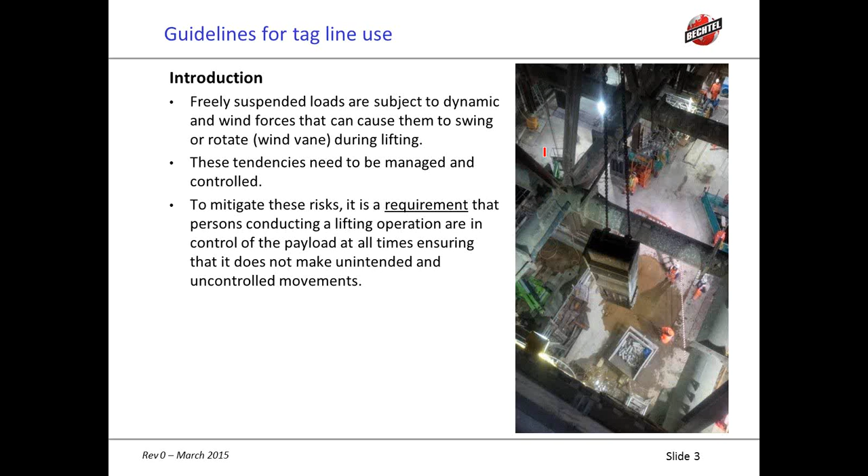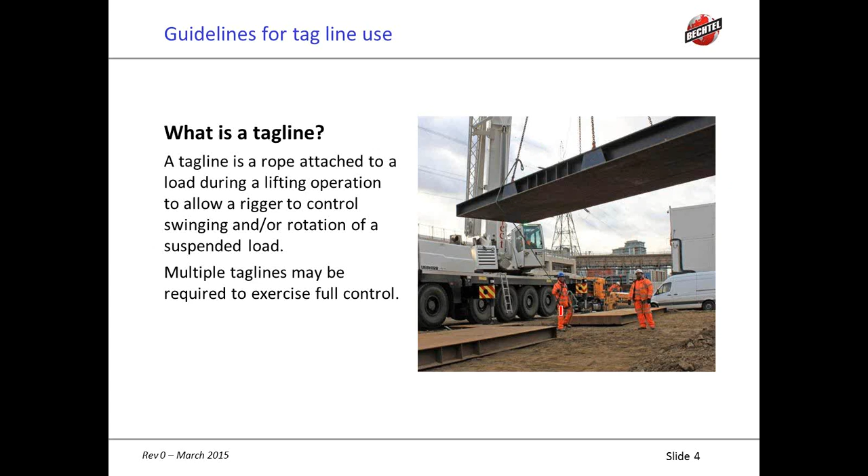So what is a tagline? Well, I assume all of you pretty much know what a tagline is, but for those who don't, it's a rope attached to a load during a lifting operation to allow a rigger to control swinging and or rotation of a suspended load. And multiple taglines might be needed to exercise full control. This here being the tagline, obviously, and this being the model tagline handler.

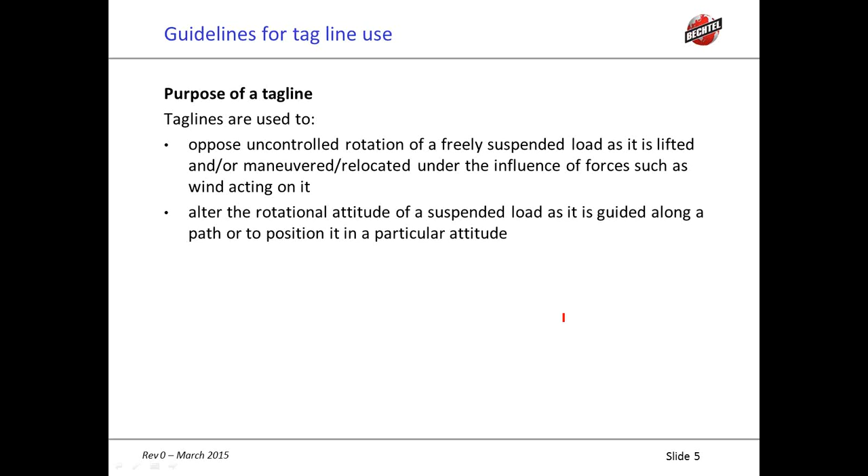Okay, the purposes of a tagline. We're going to talk about what it is and what it isn't. Taglines are used to, first of all, oppose uncontrolled rotation of a freely suspended load as it's lifted and or maneuvered or relocated under the influence of forces such as wind acting on it. Secondly, to alter the rotational attitude of a suspended load as it's guided along a path or to position it in a particular attitude. Thirdly, to assist in controlling swinging induced during lifting. And fourthly, to avoid the need for persons to put their hands directly on the load to control it, where that would pose a hazard, allowing safe distance between them and the load.

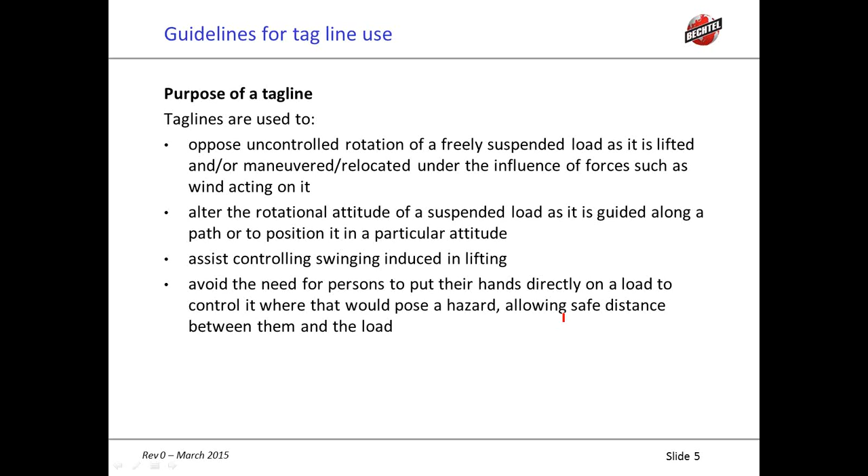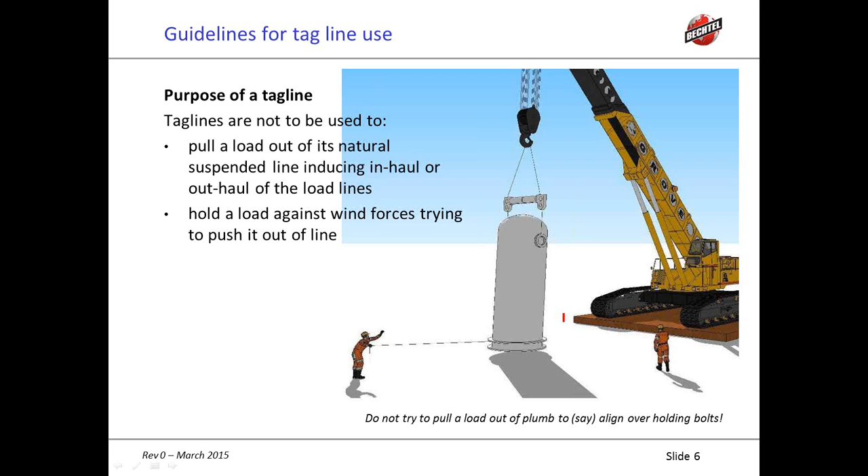Taglines are not to be used for pulling a load out of its natural suspended line, inducing in-haul or out-haul of the load lines. As you can see on this little sketch here, he's dragging it out of line. Secondly, it's not to hold a load against wind forces that are trying to push it out of line. You really cannot fight wind forces directly with taglines. Thirdly, you may not use a tagline to contribute to supporting the load.

Looks like we've got over half the people voted already, so about 5 more seconds, I'll open it up. Alright, that's about 3/4 of you have voted, so I'll close it now. The results are pretty clear: 91% say no, and 9% say yes. As Keith mentioned, keep this in mind, and we'll revisit this at the end. So back to you, Keith.

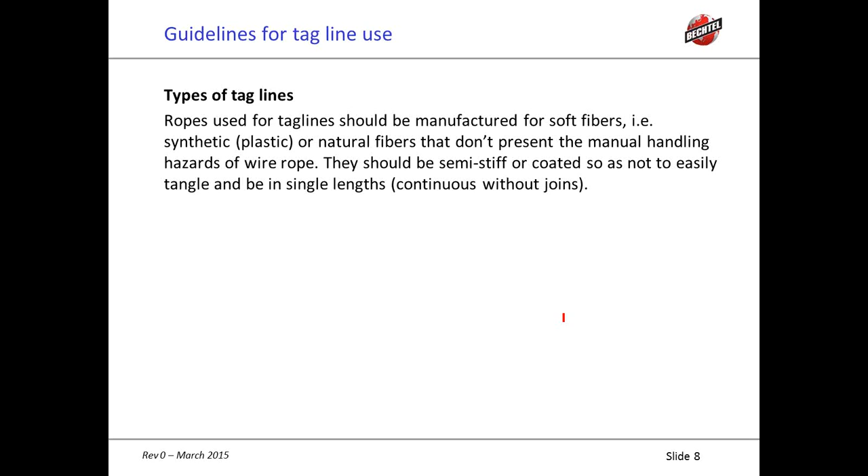Okay, types of taglines. Ropes used for taglines should be manufactured out of soft fibers, such as synthetic plastic rope or natural fibers that don't present the manual handling hazards of wire rope. They should be semi-stiff or coated so as not to easily tangle, and be in single lengths — in other words, continuous without knots in the middle tying an extra rope on. The types of rope we want to use, either natural or synthetic fibers, are made out of hemp or cotton. They're twisted or braided rope, either one. Nylon, polyester, and polypropylene.

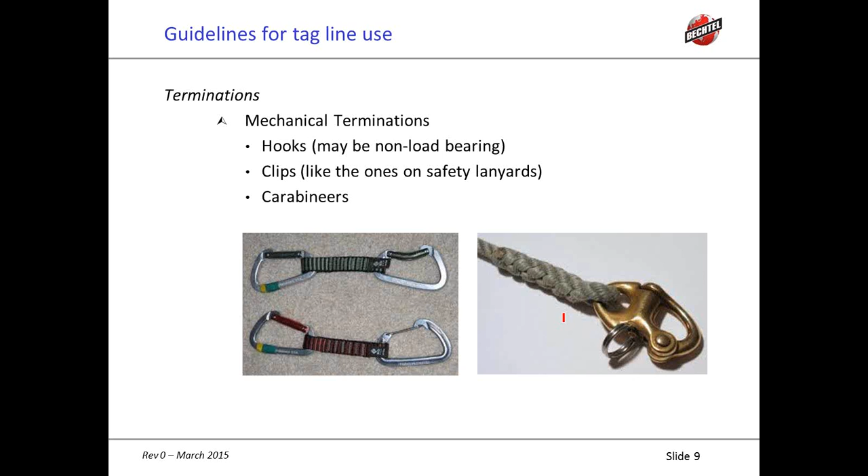The terminations that we use are mechanical terminations such as hooks, clips, or carabiners. These can be load-bearing or non-load-bearing. Also, terminations such as eyes in twisted rope, like a braided thimble, a soft eye, or a turn back eye, and in braided rope the same way. Note that using a tagline with a braided eye on one end allows us to choke it around, say, steel, for easy control and removal by personnel at heights.

Now the knots that are in the rope that we'll use to attach the loads, we're going to talk about those later. But there's also availability of retractable taglines, and we have a link on here for those.

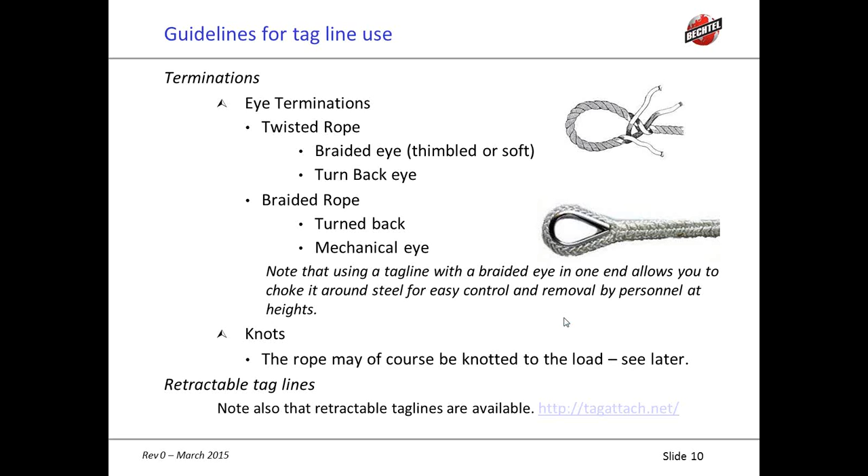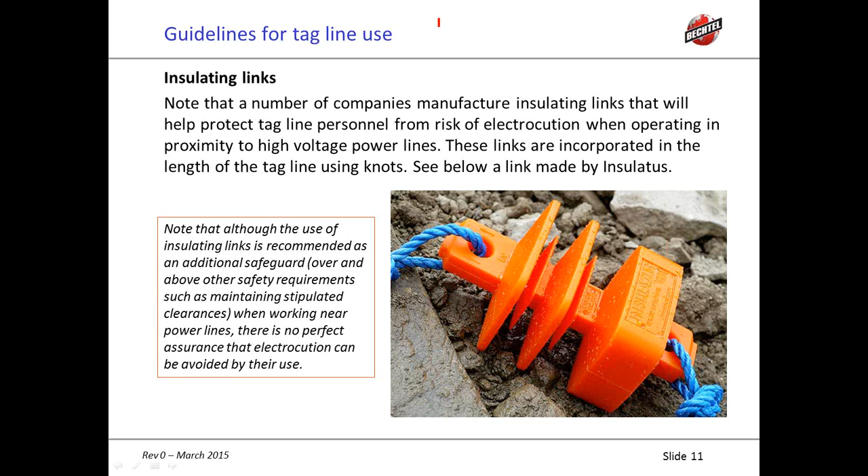Okay, insulating links. Note that a number of companies manufacture insulating links that help protect tagline personnel from risk of electrocution when operating in proximity to high voltage power lines. You would incorporate these links in the length of the tagline using knots close up to the load. The one you see there is a link made by a company called Insulatus. Although the use of insulating links is recommended as an additional safeguard over and above other safety requirements, such as maintaining stipulated clearances when working near power lines, there is no perfect assurance that electrocution can be avoided by their use. They are, however, a useful tool to have in the arsenal.

So why would a load want to rotate? There's a couple of reasons why a load may want to rotate on the hook as it's lifted and maneuvered. The main reason is the action of wind forces. Unless a load has the same area to the wind regardless of rotation, it will want to rotate in a wind to present its least area to the wind — which is the principle of a weather vane. For instance, a vertical cylindrical chemical vessel may show little or no tendency to rotate in a wind, whereas a long flat-sided steel beam of the same area may show a pronounced tendency to rotate at the same wind speed. Understanding this is a key factor in deciding whether or not taglines are required to control rotation.

Secondly, the load lines may spin up some as the load is lifted. Using taglines, the load can be held static, allowing the spin up to shake out at the bearing in the hook block. There's the two points.

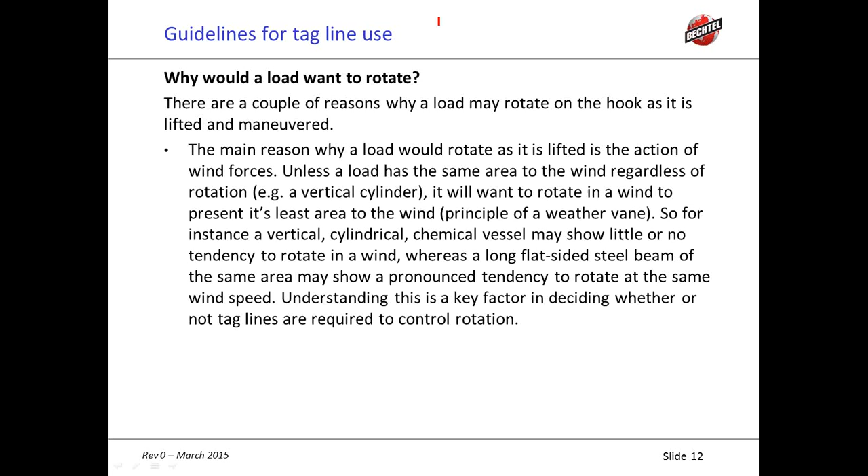Here's a couple of graphics illustrating that point. The vessel on the left is vertical and symmetrical. There's no particular reason why that wants to rotate anywhere in the wind, apart from maybe a little bit of load on the spreader, but the beam on the right will definitely want to rotate to present its least area to the wind, and could quite conceivably get very close to that crane. So the shape is important, not just the area.

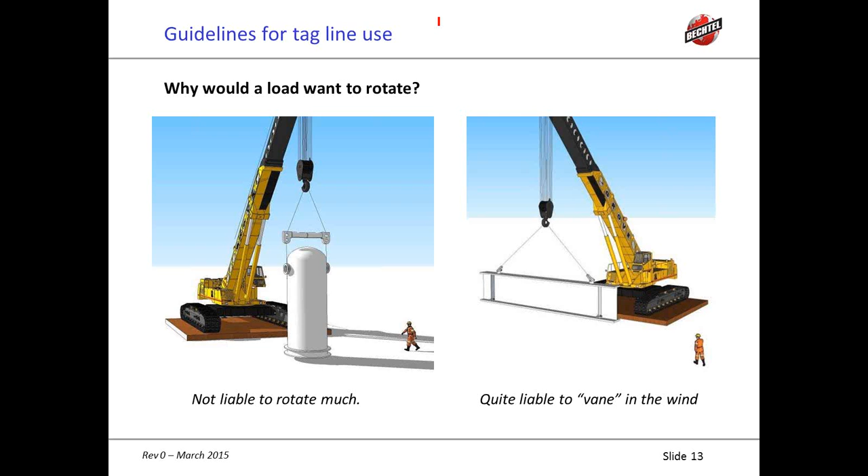Before we get too much into taglines, an understanding of the forces is important, because they can be a whole lot different than you might imagine. So let's talk a bit about wind speed, pressure, and the forces induced. The magnitude of the forces and the rotational effects acting on a load when that load is subject to wind is often not well understood, and underestimation can cause big problems. So it's time to look at some theory.

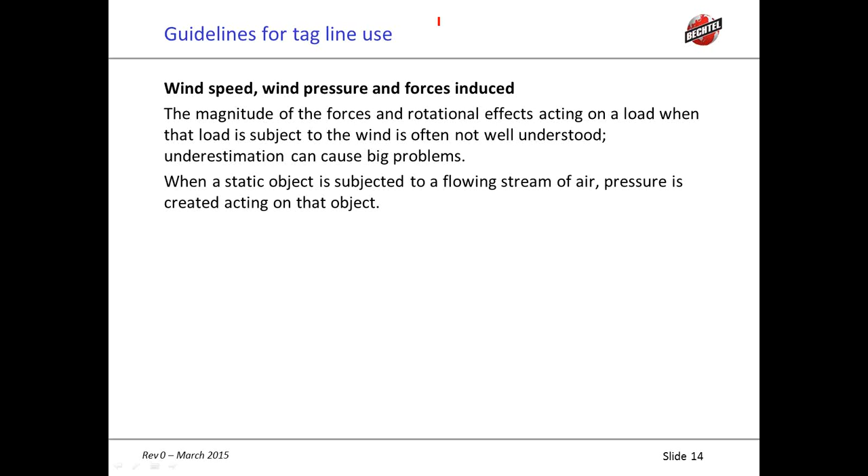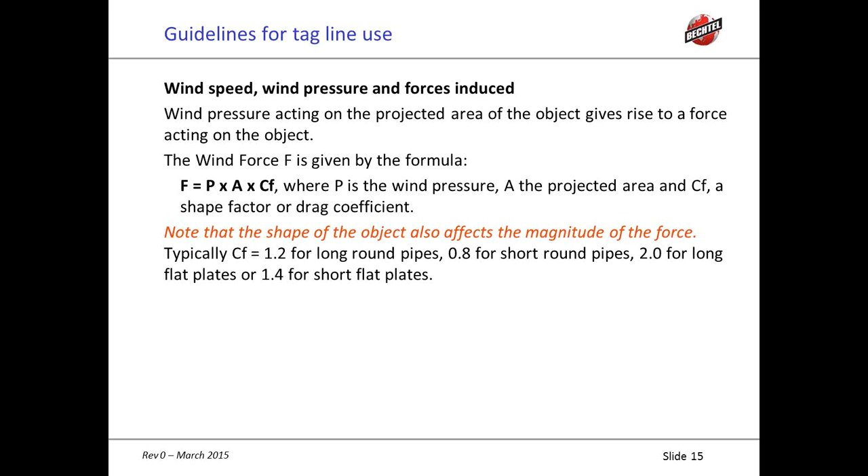So how does that relate to forces acting on the object? The wind force is given by the formula where F equals the pressure times the projected area A times the shape factor, or drag coefficient. So the shape of the object also affects the magnitude of the force. Typically you've got a factor of 1.2 for long round pipes, 0.8 for short round pipes, 2 for long flat plates, or 1.4 for short flat plates.

Wind speed is often referred to using the Beaufort scale, on a scale of 0 to 12, where 6 is a strong breeze, and that would equate to about 25 to 30 miles an hour. In the handout we're going to give you access to, there's a guide to the Beaufort wind speeds. We don't give it to you here in this presentation. Note that the standard height at which wind speeds are quoted is 33 feet above grade. So if you see a wind speed quoted, it's intended that it's at that height.

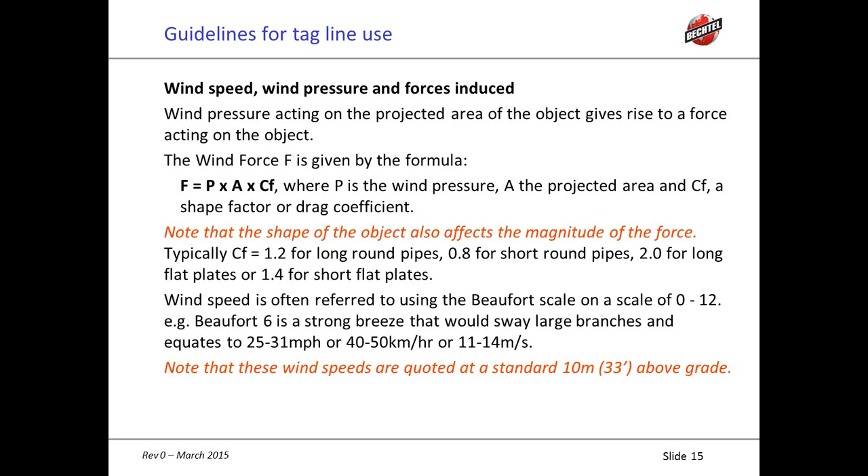Of course, the wind speed you're actually interested in is what's blowing on the suspended load, and that can be a whole lot different from the wind speed down at ground level, noting that we've just said wind speeds are quoted at 10 meters or 33 feet above grade. The wind speed actually increases logarithmically with height according to a curve similar to the following, and what that curve looks like depends on whether the air is stable, neutral, or unstable, whether it's over water or land, and whether the site is disturbed by human habitation and so on. In this case, the wind speed at 100 meters or 330 feet, down here somewhere, is twice what it is at the base level of 10 meters or 33 feet.

So this means that the pressure is 4 times that at 10 meters. You need to be aware of this. For lifting purposes, the wind speed indicated on the anemometer on the boom head should be used, as that's what's actually happening at height.

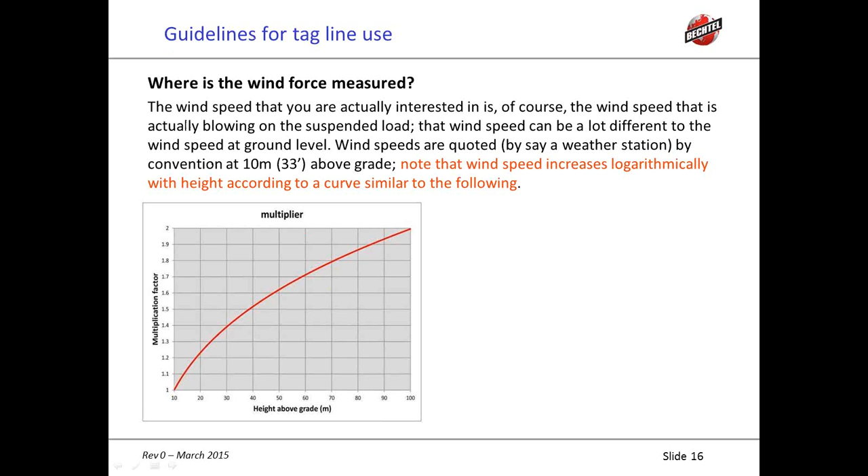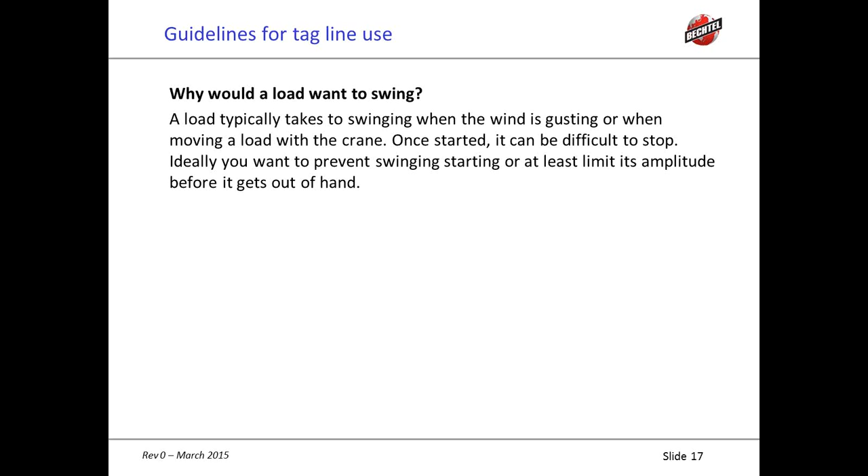So why would a load want to swing? A load typically takes to swinging when the wind is gusting or when moving with the load on the crane hook, and once started, it can be difficult to stop. Ideally, you want to stop it swinging in the first place, or at least limit the amplitude before it gets out of hand.

If an unrestrained suspended load is subject to a sustained wind force, it actually moves sideways, inducing an out-of-plumb angle in the suspension. The forces balance when the horizontal component of the tension equals the wind force, and the load reaches a state of equilibrium at a slight out-of-plumb, so long as the wind continues to act in a constant manner.

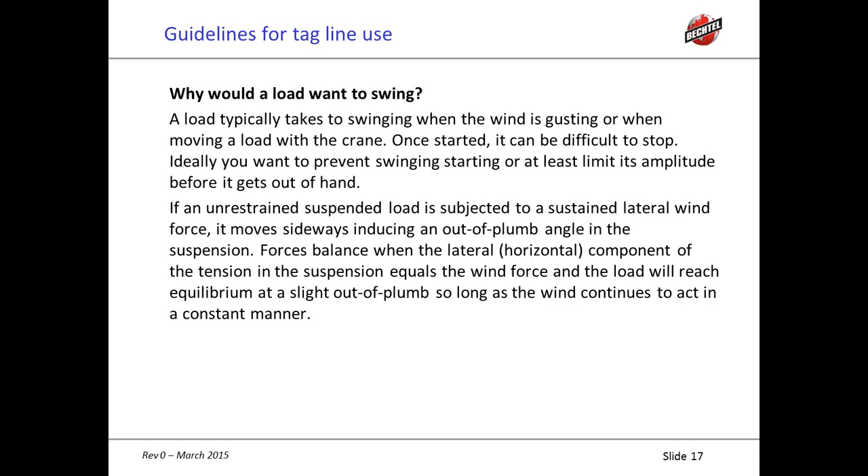Of course, the second the wind drops, that force is no longer there, and the whole thing starts to swing. So let's look at an example here. We'll just do it in the US customary units.

If you take a 10-foot by 10-foot cladding panel in a 20-mile-an-hour breeze facing the wind, and assuming a shape factor of 1, there's going to be 100 pounds of wind force acting on that panel, remembering that the pressure is the wind speed squared over 400, multiplied by the area, gives you the force. That's where the 100 pounds comes from.

If the panel weighs 1,000 pounds, the load will move horizontally approximately 1/10 of the suspension height until the forces balance. So if you have a suspension length of about 50 feet, the load's going to move about 5 feet sideways in that wind, which is a pretty considerable distance. If the wind drops, it'll tend to return back to plumb, and swinging will be induced.

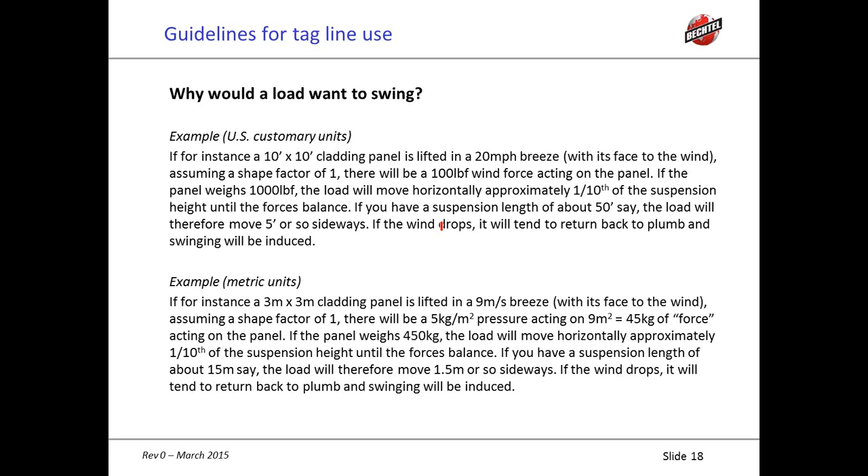So it's not just the fact the wind is blowing. Gusting is a major issue. So why would a load want to swing?

Well, on account of inertial effects. When you move a load with a crane, the crane moves forward, but the load initially stays where it is, which is inertia, until accelerated by the horizontal component of the tension in the now slightly inclined suspension. If the crane suddenly stops moving, the load's momentum keeps it moving, and it will swing like a pendulum until eventually it comes to rest.

To minimize this, an operator should gently accelerate and decelerate the crane so the load keeps up with the crane without swinging wildly.

Note that there is a natural frequency to the swing, which is independent of weight and is related to the suspension length. If you're really unlucky, wind gusting can reinforce this natural swing, ever increasing the amplitude of the swinging. You can see from this that light loads with large sail areas can be particularly problematic.

So the takeaway from all this is, don't lift light loads with large sail areas in high winds. If loads start to swing, attempt to damp down the movement. If that's problematic, possibly turn the load to present its least area to the wind, wait until it stops swinging, and then turn it back and try again with improved control.

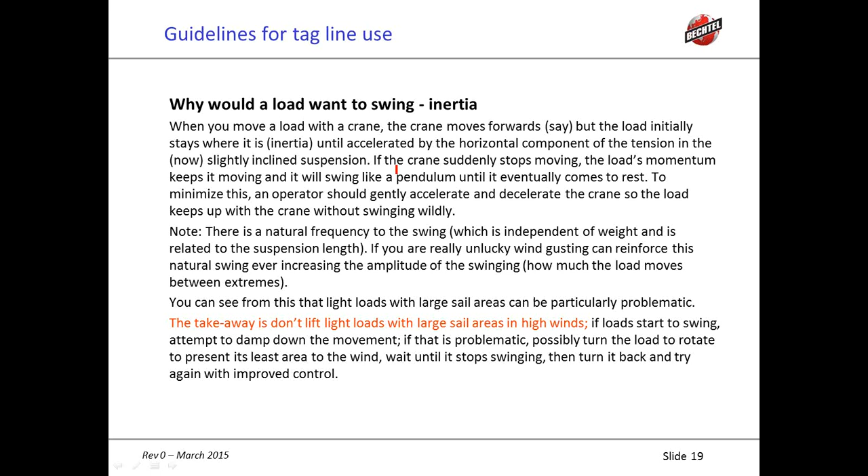OSHA in the States says taglines on a load are required where hazards to employees exist, in order to keep the loads under control. So it doesn't say you have to use them all the time, it says where hazards to employees exist. In the UK, LOLER says appropriate measures should be taken to prevent a freely suspended load from moving in an uncontrolled manner where the risks justify it.

Taglines may be necessary to stop the load swinging, for example with an overhead crane. And the British Standard relating to cranes says, if one or more handlines or taglines are required to give more control of the load, the appointed person should designate persons to handle the lines.

So a common theme is that taglines are required to control a load where they're needed. On the other hand, where they are not required to control a load, they're not required to be used. That said, I would recommend they are used unless they would serve no useful purpose and could potentially create a snagging hazard. How many taglines you need, where they should be located, and what their purpose is needs to be evaluated as part of the lift planning exercise and should come out of the initial risk assessment.

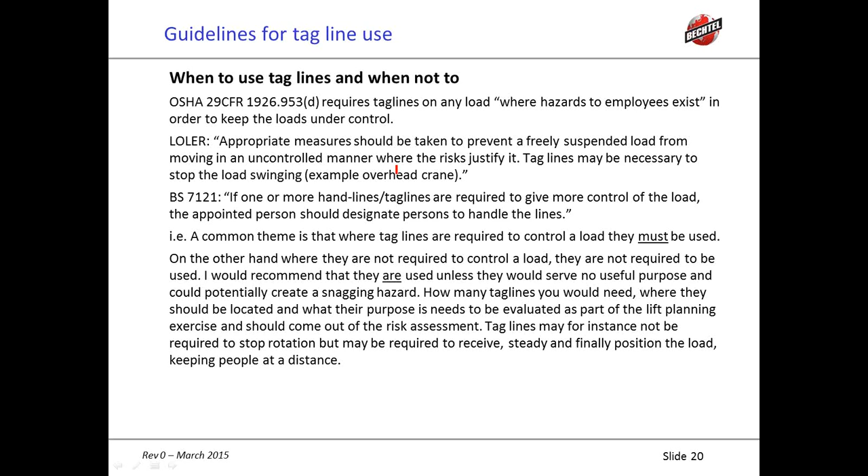Taglines may, for instance, not be required to stop rotation, but they might be required to receive, steady, and finally position the load, keeping people at a distance. Taglines should, therefore, be used unless they would serve no purpose and could actually create a hazard.

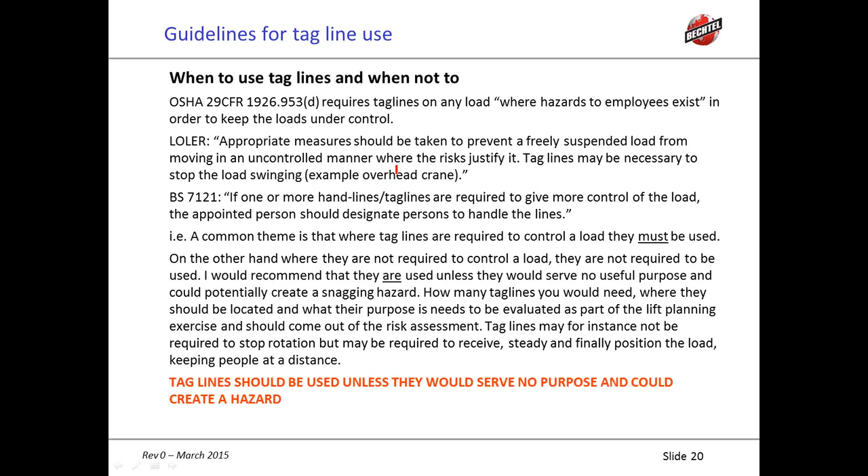What about loads that are suspended from two cranes? Up till now we've been talking about singly suspended loads, but in this case we have a tandem lift. Loads suspended from two or more lifting devices, cranes for instance, will not freely rotate in the wind, but they may swing a little.

Trying to use taglines to rotate a load suspended from two cranes is a really bad idea. First of all, you're going to store twist. The second you release the line, the load will revert back to its natural attitude in an uncontrolled manner. Secondly, you don't have the strength to fight the cranes, so you should carefully consider whether the use of taglines in these cases contributes anything useful. Of course, it may be required to control swinging of the suspended load, so that might be your rationale for using them in this case.

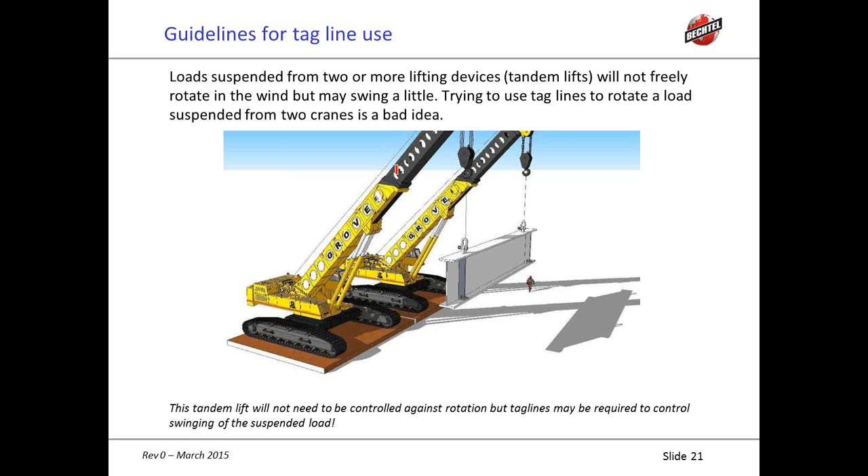Putting your hands on the load, manual control. There may be instances when it's necessary for one or more persons to put their hands on the load, for instance, final alignment over holding down bolts. Trying to do this with taglines could virtually be proved to be impossible, but there's a few things that we need to keep in mind.

Number one, never reach above shoulder height to access a load. Place your hands on the surface and never in, on, or under the load, or at the end of a load, especially when swinging or booming. Maintain an arm's length away from the load. Walk the load down. Reaching down also, the same as reaching up, moves you closer to the load.

Dynamic effects on the load, such as wind, pendulum actions, and swinging, can put you at risk. Never place any part of your body in between a load and another object, such as a pinch or a crushing point. Make sure that good communication is always maintained, especially when hands are on the load. Keep your fingers, nose, and toes, etc., well away from pinch points. Raising or lowering should only be initiated at the command of the person in charge and after confirmation that everyone is clear.

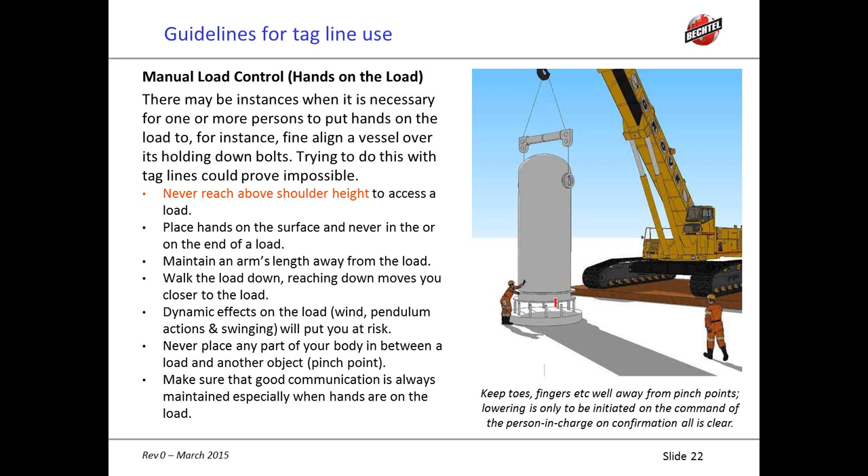You can see here that the guy who's doing the signaling is in clear sight of the guy who's controlling the load here, and also the crane operator. It's important that all the participants in the operation are in good communication with each other.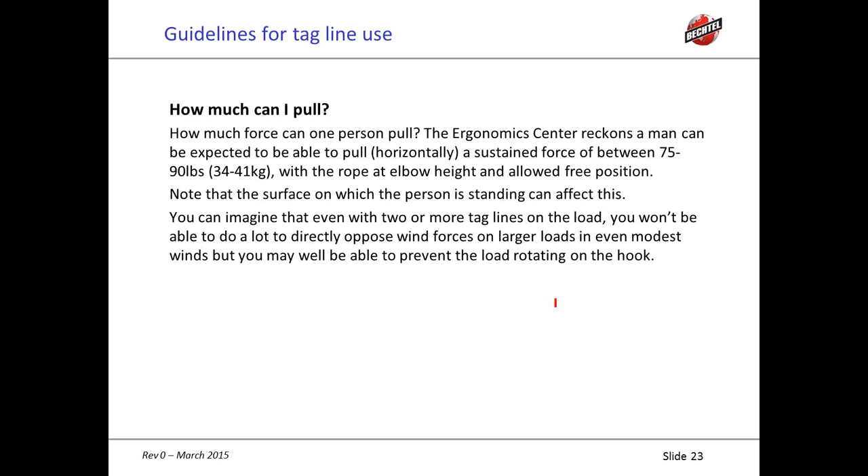So how much can we pull? How much force can one person pull? The Ergonomics Center reckons that a man can be expected to pull horizontally a sustained force between 75 and 90 pounds, or 34 to 41 kg, with a rope at elbow height in a free position. Note that the surface on which the person is standing can affect this. Even with two or more taglines on a load, you won't be able to directly oppose wind forces on larger loads, even in modest winds, but you may well be able to prevent the load from rotating on the hook.

So how much can we pull? We thought we'd test it out. So I went back here in the warehouse and weighed myself, came out just over 200 pounds, then took a scale, tied one end of it to an immovable object, and got on the other end with it. You can see my stance here. With a maximum sustained force, a max of force, I got about 90 pounds.

A sustained force of about 75 pounds. Our practical test confirmed this, that a 200 pound man can pull about 90 pounds max when allowed a free stance and standing on a rough surface. This reduces to about 75 pounds sustained. I moved inside on smooth concrete where the friction is less and I could pull less. So it's reasonable to project that a lighter man would pull less than this.

As a rule of thumb, a man might be able to pull a maximum of about 45% of his weight and a sustained pull of about 35% of his weight. Now this is at a horizontal pull. This is a bit subjective, but it gives some measure to work from. If your boots cannot get a good grip on the ground, this can be a lot less.

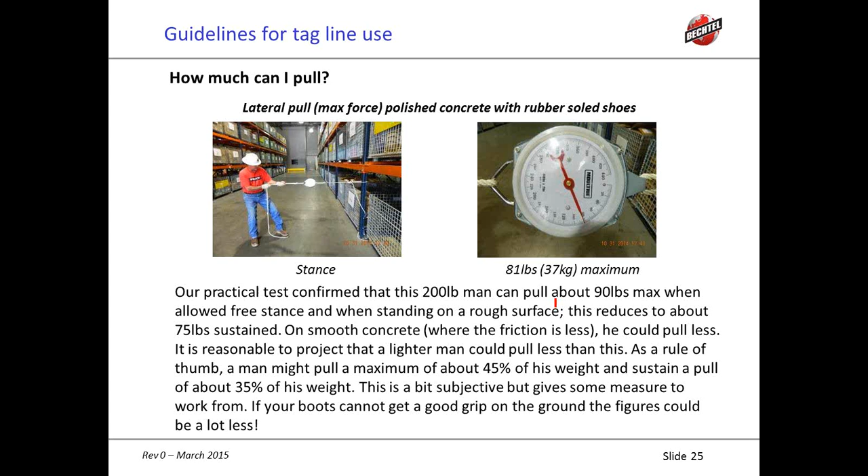So, factors affecting the effectiveness of the pull. Given that you have a limited ability to pull, you want to make your pull as effective as possible. To achieve that, the aim is to make the moment arm as great as possible, to give your pull the maximum turning effect about the crane hook.

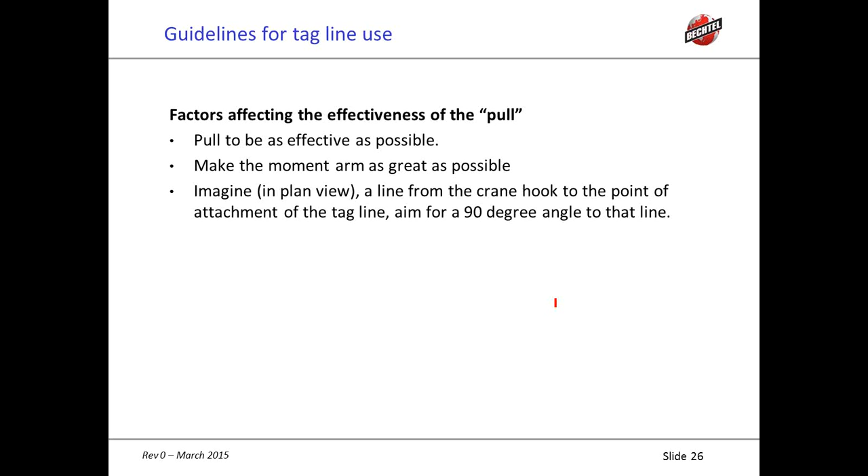The moment arm is the horizontal distance perpendicular from the point of rotation, i.e. the crane hook, to your line of pull. In other words, you want to be square on to the axis you're turning around. If you imagine in plan view a line from the crane hook to the point of attachment of the tagline, your pull is most effective if it makes a 90-degree angle to that line. Obviously you cannot realistically achieve that all the time, but that's what to aim for.

So what am I talking about? Well, if you look down here on the bottom picture, this is pretty effective. The line of rotation is going to be at the center of the bearing here, so it's going to rotate around this axis. This guy here is on a tagline, he's got his line horizontal, and he's making about a 90-degree angle to the line from here to the point of attachment. So if you imagine that line there, he's making about 90 degrees to it. And this other guy on the other end is doing about the same. But between the pair of them, they can prevent rotation in either direction.

You look up here, for instance, and they've got themselves stood off to the end here. If you project that line through, it has a very small distance to the axis of rotation, and it's not going to be very effective at preventing or creating rotation. They need to move around over here somewhere to be more effective. We often see people that are stood like this, and it really doesn't give you a whole lot of load control. Try and get yourself square on if possible - your limited pull is going to be most effective in that way.

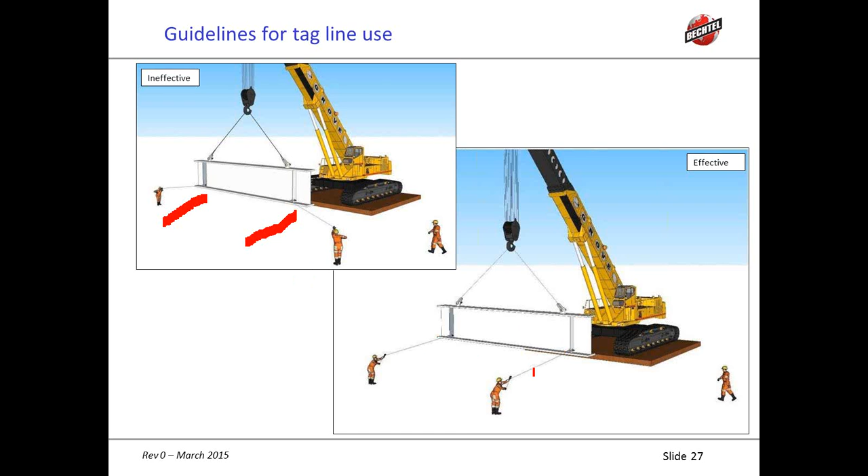Secondly, your pull is most effective when the tagline is near horizontal. When working at or near ground level, that's pretty easy to achieve. However, much of lifting involves raising the load to height. So the greater the angle the tagline makes to the horizontal, the less effective the pull is in its ability to rotate the load in a horizontal plane. By the time the taglines are 45 degrees, the pull is only 71% effective. We've got a graphic in a second which will explain this.

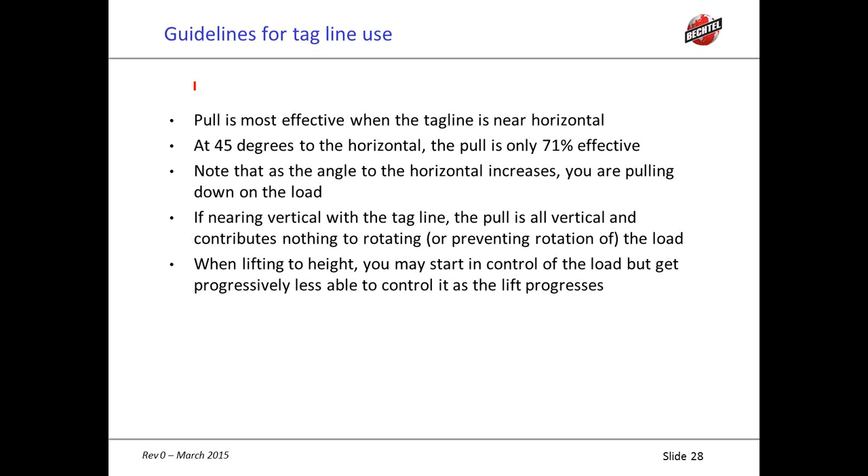You should also note that as the angle to the horizontal increases, you're actually pulling down on the load. At 45 degrees, 71% of your pulling force, i.e. the tension in the tagline, is acting down on the load. If you go as far as nearing vertical with a tagline, the pull is all vertical and contributes nothing to rotating or preventing rotation of the load. So you may start in control of the load, but progressively less able to control it as the lift progresses.

So you see here, they probably started off in this case pretty effective when they were down at the ground, but by the time it's up here somewhere, that tagline is nearly vertical and is contributing next to nothing in that direction. The pull is all down over on the beam and none of it's out over. And we often see this - I mean, how many times do we see this kind of thing? The guys start off on the ground and the lift goes up, they get less and less effective, the wind picks up, next thing you know the load's taking over from the guys.

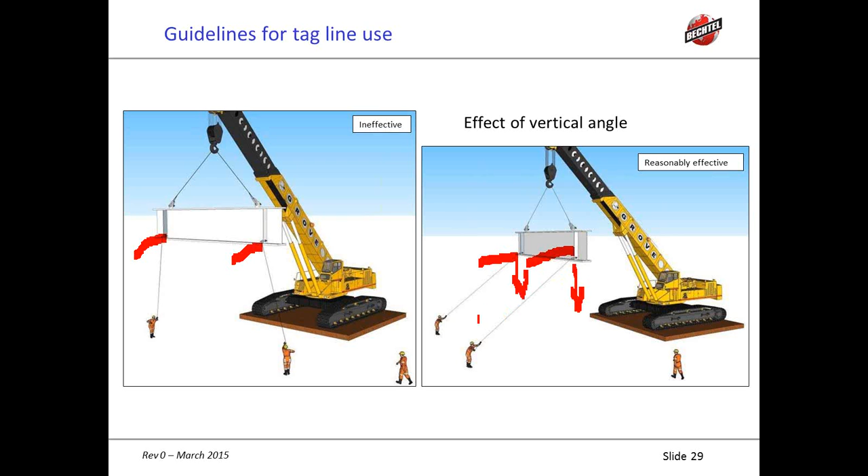You need to try and get yourself to this kind of situation whereby even when the load is at height, you still have a fairly respectable pull in this direction. In this case we're at 45 degrees, so that's 71%. However, even in this case, when you pull on here, that's going to go down there. And this guy is going to be pulling, it's going to go down there. With two guys, that's actually going to pretty much balance itself out, but that can be something to watch out for in some cases.

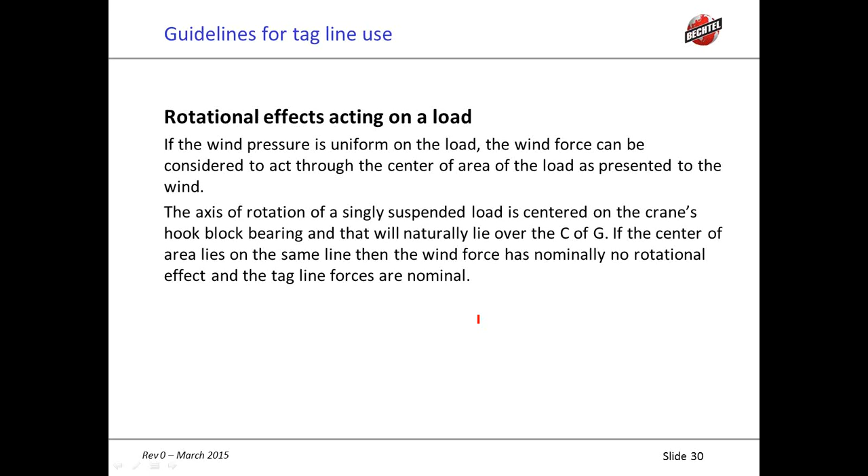Rotational effects acting on a load. If the wind pressure is uniform on the load, then the wind force can be considered to act through the center of area of the load as presented to the wind. The axis of rotation of a singly suspended load is centered on the crane's hook block bearing, and that will naturally lie over the C of G. If the center of area lies on the same line, then the wind force has nominally no rotational effect, and the tagline forces are nominal.

A load whose center of area lies to one side of the C of G will have wind forces acting to one side of the axis of rotation. To hold that load static against the wind can require considerable force. Do not underestimate this. So what am I talking about?

In this case, we've got some pretty substantial plates on the end of the beam, and that's dragging the C of G towards that end. So in a singly suspended sense, that's going to lie directly underneath the crane hook, and that's where it's going to want to rotate around. The center of area, however, is right there, so the wind force is acting there and is causing a rotation because of the distance from here to the C of G. That moment arm is causing this wind force to want to rotate that around the hook.

So what's going to resist it? If it's trying to go that way, you've got to pull that away, or that way. This guy in this case is positioned where he's most effective because he's the furthest distance away from the C of G. If he was to stand at this end, he's not as far away from the C of G, and his pull is going to be less effective. Of course, in practice, you're probably going to need him in both places.

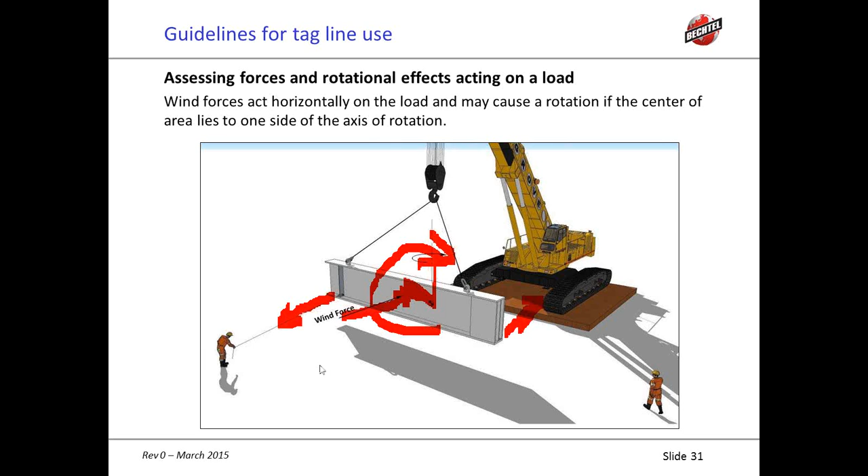So let's do a little analysis. We've got the same graphic up here at the top. Let's consider a plate girder, which is 10 feet deep and 60 foot long. It's got these thick plates up at one end. The C of G is 20 feet from one end, in other words it's there, and 40 feet from the other end. So it's 10 feet off center. The center of area is at mid-length, which is there. Lateral forces are thus acting 10 feet offset from the center line of suspension.

So let's consider lifting in a 34-mile-an-hour wind, assuming that's what's actually happening right there at the lift. The wind pressure in pounds a square foot is given by that formula there, or the easier formula, which is V squared over 400, which is the same thing. At 34 miles an hour, the pressure comes out at 2.9 psf, so let's call it 3 psf for simplicity. With a projected area of 600 square feet, which is the 60 by the 10, and assuming a shape factor of 1, the force is going to be 1,800 pounds.

And that acts right there. The moment, which is the rotational effect, is that 1,800 times the 10-foot offset, which is 18,000 foot-pounds. If a single tagline is used at the 20 feet end, the moment arm is only 20 feet. So that guy on that tagline has to provide 18,000 divided by 20, which is 900 pounds of pulling force to stop that thing rotating.

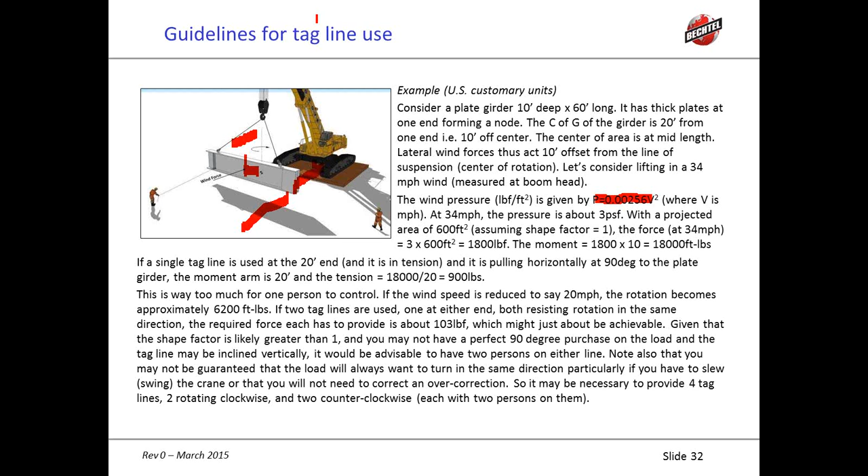We've got a metric example here for those of you who work in the metric system. I'm not going to go through it, but it's there in the accompanying PDF.

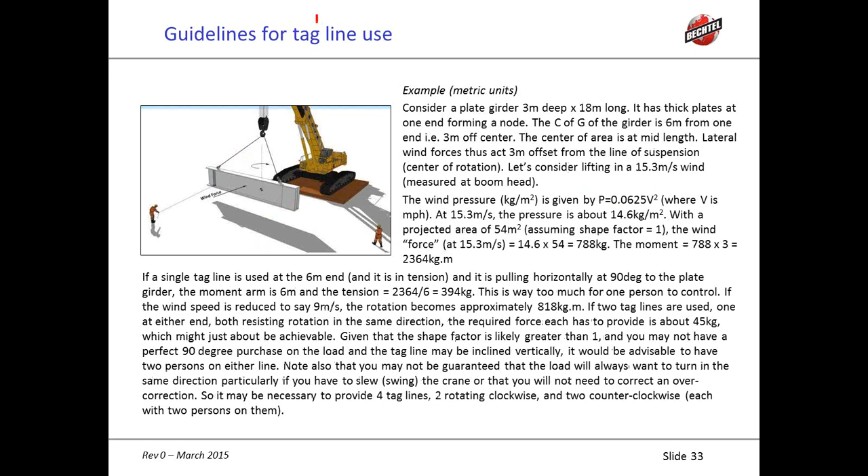So, other considerations. Guiding a load in a dead calm only requires you to overcome the resistance of the bearing, and you've got a lot of mechanical advantage working for you. In other words, the bearing is small, but you're attached a long way away from the axis of rotation, so you have a lot of mechanical advantage, and the forces should be pretty small.

Secondly, once a heavy load is moving, it's got inertia, and it can take a lot of stopping. It's much better to stop it from moving in the first place. So if it does get moving, ease the load where you want it using the taglines. Don't get it moving too fast, and ease back on the pulling before you get where you want to be, and allow the load to decelerate to a stop where you want it.

How often do you see someone rotating a load and they're pulling like hell on it? The load comes where they want and the inertia carries it straight past, and then the guy on the tagline has to dash across to the other side of the load to try and pull it back because he's gone too far. Don't do that. Realize that the load is going to continue moving once you stop pulling, and it's gradually going to come to a halt.

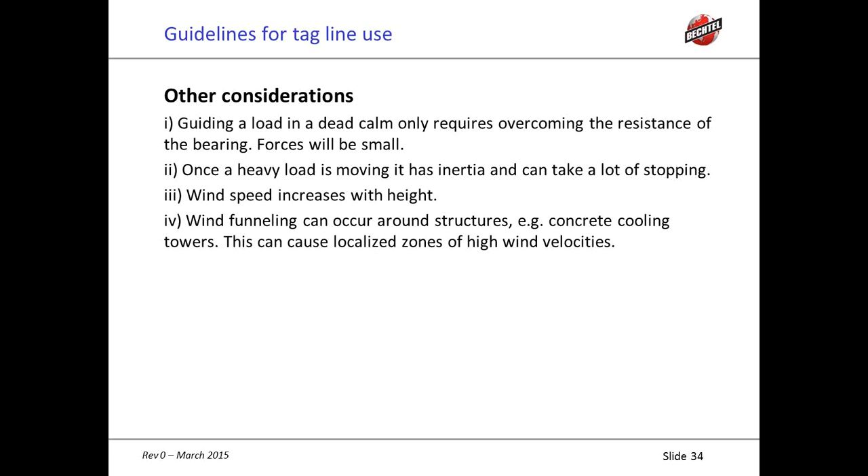Thirdly, wind speed increases with height. It should be assessed at the crane boom tip. Further, you might be sheltered at ground level, but exposed as the lift progresses above the surroundings. And don't ignore either that wind funneling can occur around structures, for instance cooling towers. This can cause localized zones of high wind velocities.

So when you should decide to lift and when not to lift. As you can see from all the preceding considerations, there's a number of factors that come into play when you're lifting that affect the ability to control the load. And as we said right up front, you have to be able to control it. These factors include the prevailing and predicted wind speed at the height of the lift when conducting the lift. In other words, go out there and see what the wind's doing and also what it's predicted to be doing.

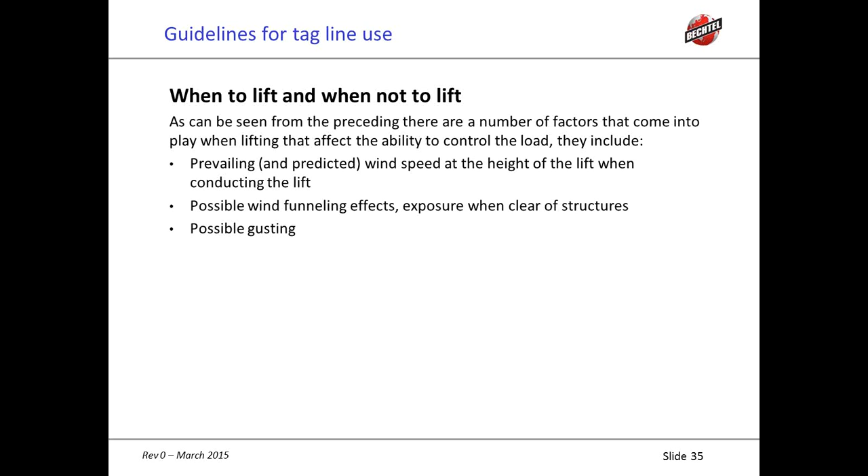We've seen that the size of the load, the shape of the load, and the weight of the load is also important. You've got to consider gusting. You've got to, as I said, consider load, shape of load, weight of load.

How close to capacity is the crane? You know that the crane has its rated capacity and it also has a limited lateral capacity. How close are you working to the capacity of the crane? What about clearances between the load and the crane and structures? If you're working to very tight clearances between the load and the crane boom, or between the load and structures, you're going to want to be pretty conservative in controlling this thing. You might want a real low wind speed, for instance.

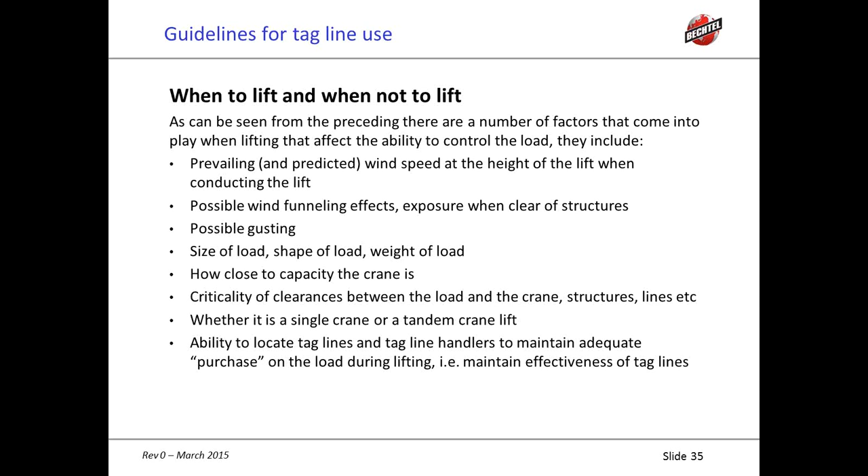Is this a single crane lift or a tandem lift? You need to have the ability to locate your taglines and the handlers to maintain adequate purchase on the load during lifting, i.e. you have to maintain effectiveness of your taglines. If you can't do all those things, you shouldn't be lifting.

Bear in mind as well that even though the manufacturer may put a limiting wind speed, which might typically be, say, 35 miles an hour, in the crane manual or on the chart, that doesn't necessarily mean that it would be safe to lift a particular load at that wind speed.

And note as well that some capacity charts are based on a particular limiting wind speed, which could be, for instance, 9.81 meters a second, and an area of the load which doesn't exceed, say, 1.1 square meters per ton of capacity. Those charts typically provide formulae by which a lower limiting wind speed can be calculated when the load has a greater area.

Other charts might simply say operator judgment to be exercised. If a load cannot be safely controlled, it should not be lifted, and the judgment ultimately falls on the crane operator—it's necessarily somewhat subjective, and it must be respected. Many times management on the job wants to get the lift done regardless, and they'll put a lot of pressure on people, saying things like 'it says in the manual 35 miles an hour' or 'it's not blowing too hard down here.' At the end of the day, if it can't be done safely in the opinion of the crane operator, then it shouldn't be done. So respect the judgment of the people doing the work.

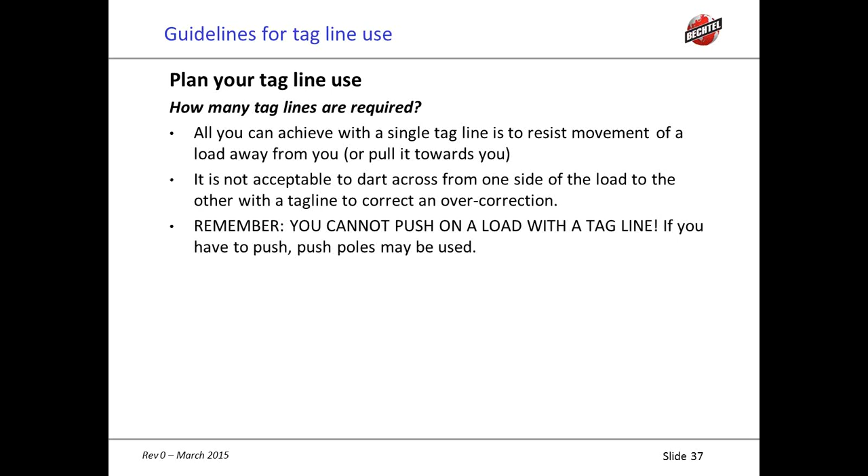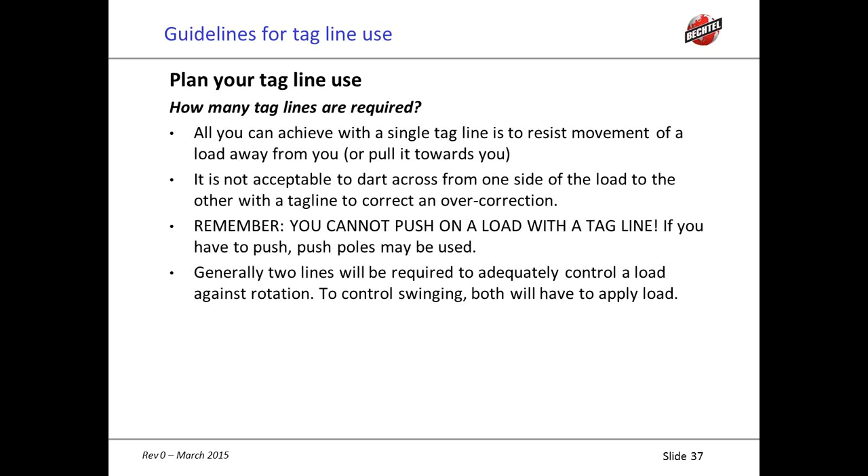Generally, 2 taglines are required to adequately control a load against rotation. To control swinging, both will have to apply load to it. Of course, anybody handling the load should keep in touch with the load at all times, in order to apply or resist the load when needed without having to take a whole lot of slack out.

Remember that if attempting to control a long load at height with a tagline at a steep angle to the horizontal, the force you apply to the tagline has a horizontal component, which is what you want, and a vertical component, which you don't want—that's trying to drag down the end of the load to which it's attached. Using 2 taglines may help balance this.

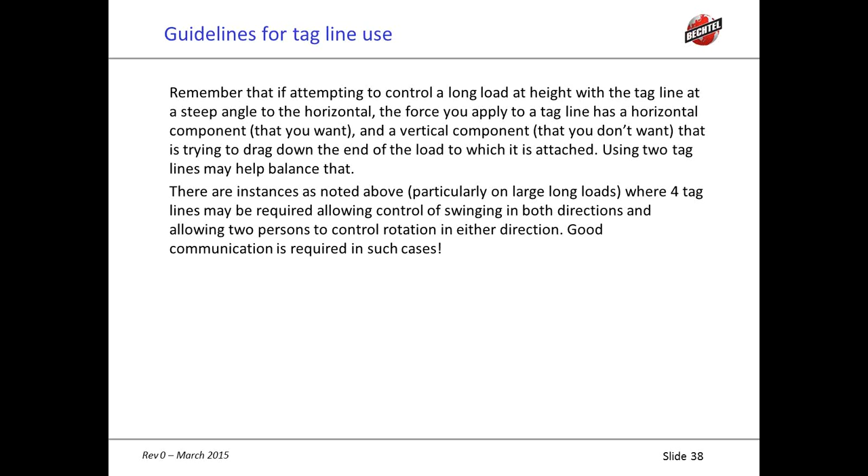There are instances, particularly on long loads, where 4 taglines may be required, allowing control of swinging in both directions and allowing 2 persons to control rotation in either direction. Good communication is required in such cases. Also note that when erecting steel, generally only 1 tagline is used to receive the steel and then orientate it as needed. The tagline is usually put on the numbered end of the piece so the connectors know which end goes where.

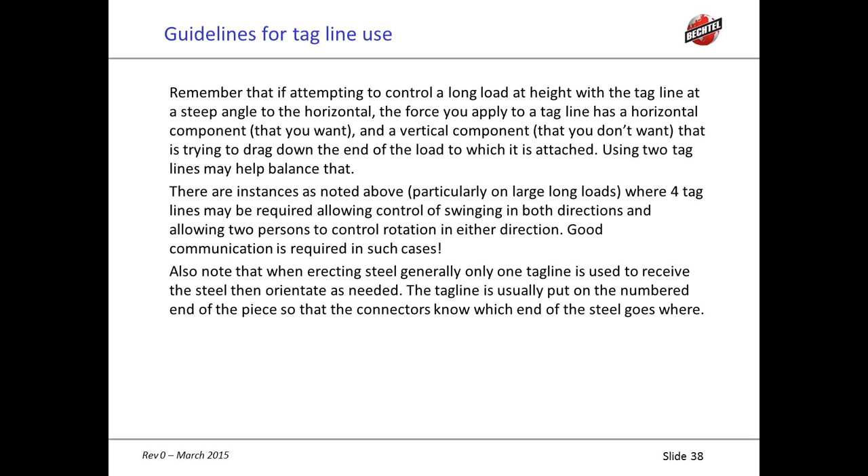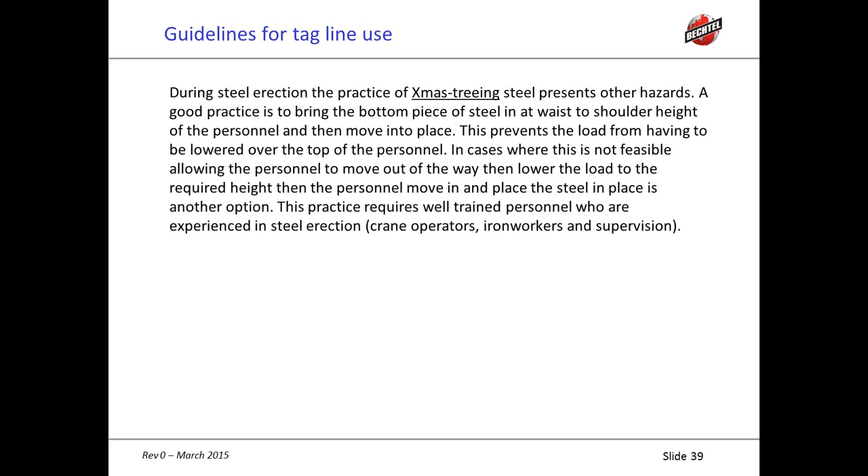During steel erection, the practice of Christmas-treeing steel presents other hazards. A good practice is to bring the bottom piece of steel in at waist to shoulder height of the personnel and then move into place. This prevents the load from having to be lowered over the top of the personnel. In cases where this isn't feasible, allowing personnel to move out of the way, then lowering the steel to the required height, and having personnel move in to place the steel is another option. This practice requires well-trained personnel experienced in steel erection, especially the crane operators, iron workers, and supervision.

Where to attach? Tagline should be attached to the load towards its lateral extremes—as far away from the axis of rotation as possible to get the best purchase against rotation. They should be attached to a lug, nozzle, structural member, or other substantial and solid member capable of taking significant force without being deformed, damaged, or moved. Taglines should not be attached to the rigging supporting the load unless that's the only option and assessed to be safe to do so—we'll talk about that in a moment. They should not be attached to door handles, valves, or items of equipment, and shouldn't be attached where they could slip off as the operation proceeds.

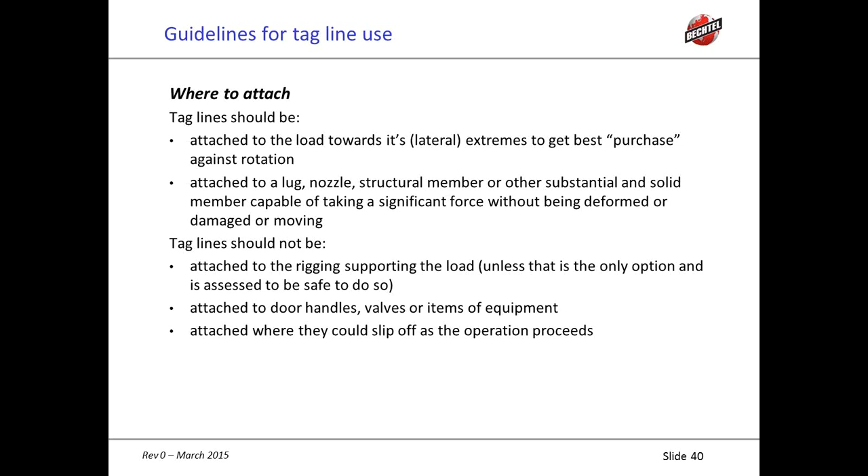How long should they be? We often see people going to make a lift and then they realize as it's going up there that the taglines aren't long enough and they let go of them. How long do they need to be?

First of all, decide what control is required. Is it required only during uplift and receipt? Is it required through the entire operation? Will control have to be handed off to someone at height maybe? Will I have to let go of the taglines at some point? And if so, will they be a hazard?

The taglines need to be long enough to keep your body parts out of harm's way, long enough to reach the load from where it will be to where the handler has to stand with some reserve considering the load height, long enough that the handler can be positioned so the angle of the tagline to the horizontal doesn't get so steep that control becomes impossible as the lift proceeds, and not so long as to create a snagging hazard.

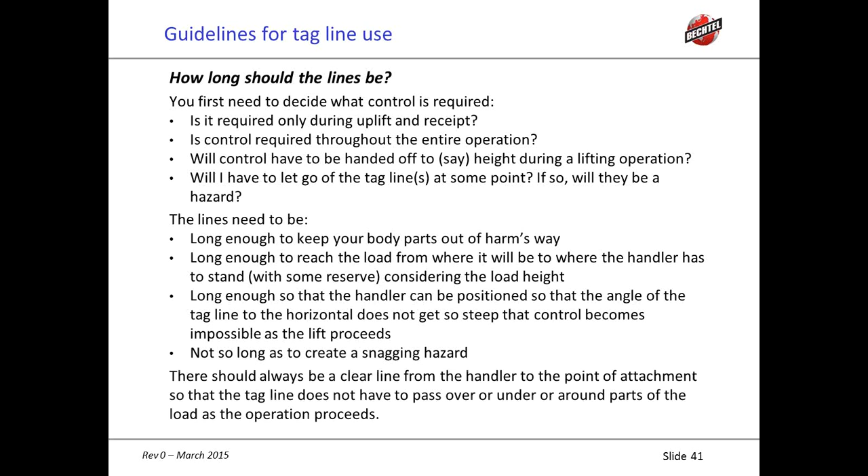And there should always be a clear line from the handler to the point of attachment so that the tagline does not have to pass over or under or around parts of the load as the operation proceeds.

Where to stand? As noted earlier, taglines are most effective if their line of action forms a 90-degree angle in plan view to an imaginary line from the center of gravity to the attachment point. Tagline handlers should aim to position themselves as close to that as possible, consistent with being in sight of each other and the crane operator if possible. As the load is turned or rotated, this angle will depart from 90 degrees and the pull becomes less effective.

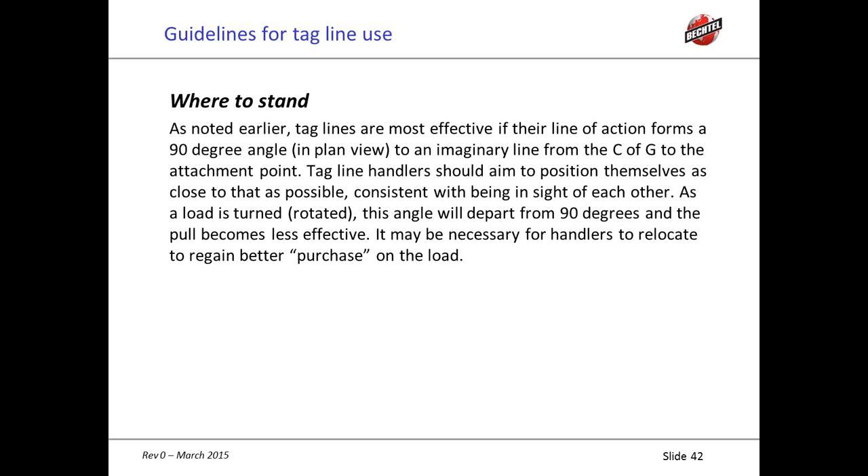It may be necessary for handlers to relocate to regain better purchase on the load.

Now, moving with the load, as much of lifting involves relocating a load either by hoisting, swinging, booming out, crawling, or some combination of these, tagline use needs to reflect this. The persons handling the taglines will either need to move with the load and or be able to pay out the tagline.

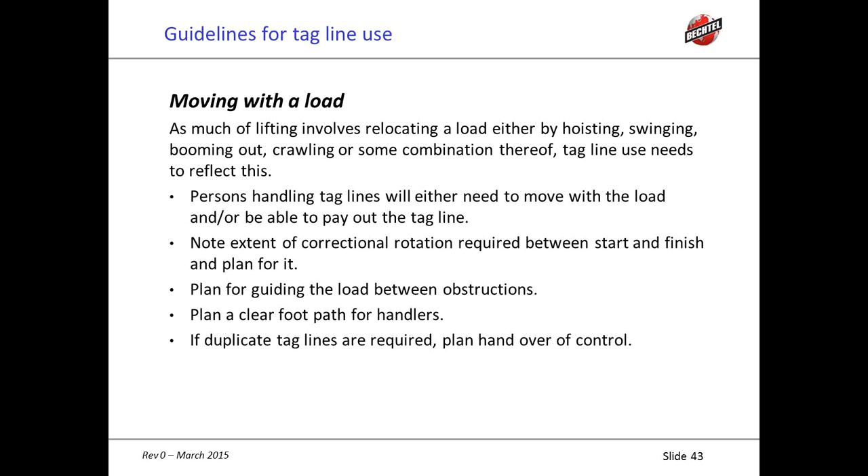Note extent of correctional rotation required between start and finish and plan for it. Plan for guiding the load between obstructions. Plan a clear footpath for the handlers. If duplicate taglines are required, plan to hand over control. The load must not be allowed to take over and drag the handlers along a path of its choosing.

Points to consider in preparing a tagline plan for lowering down a shaft include: how many taglines are required? What rotational swing control or adjustment of attitude is required from uplift to the shaft opening?

How many taglines are needed? How long do they need to be? Where can the handlers stand? Noting that, of course, they can't stand in the shaft opening, they're going to need to be some distance away. How critical is rotational control as the load enters and is lowered down the shaft? Can that be controlled? At what point should the taglines be released, if that's necessary? Will they cause a snagging hazard?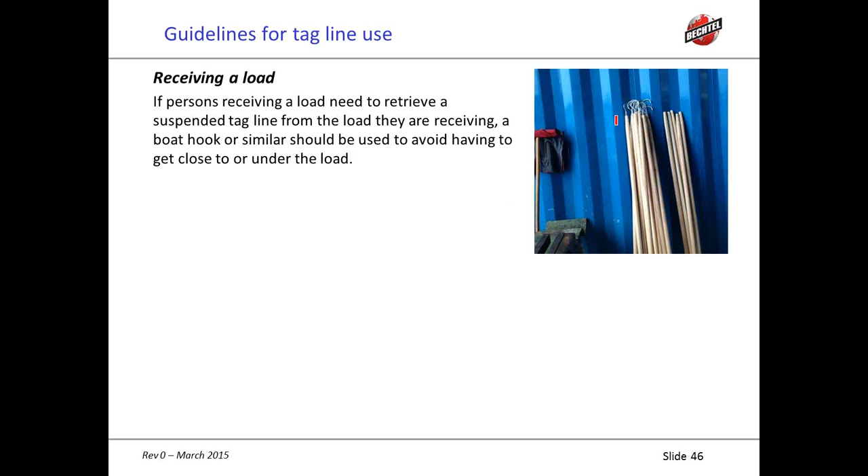There's also a device like this, which is an Australian invention. They put this extension on, in this case to a man basket, and it allows you to provide an attachment point that's remote from the load, so you can keep yourself from being under the shadow of the load.

And remember, where possible, stand downwind when retrieving a tagline, so the line's coming towards you rather than away from you.

Okay, knots. When to use which knot? Bowlines are used when there is a fixed point, such as a bolt hole or a lug on a piece of equipment to tie to. Clove hitch for single pieces or bundles of round stock, such as pipe, rebar, or any round material.

We use a choked loop on single pieces of square stock, such as beams and columns or angle iron. Now I tend to use a figure 8 on a bight when loads on taglines are going to be a lot higher, such as long taglines used in conjunction with anchor points, say a dead man or heavy equipment, or a capstan hoist.

We talked a little bit about where to attach them earlier: as close to the end of the load as feasible for ease of control, as explained earlier, and also for ease of retrieval when accepting a load.

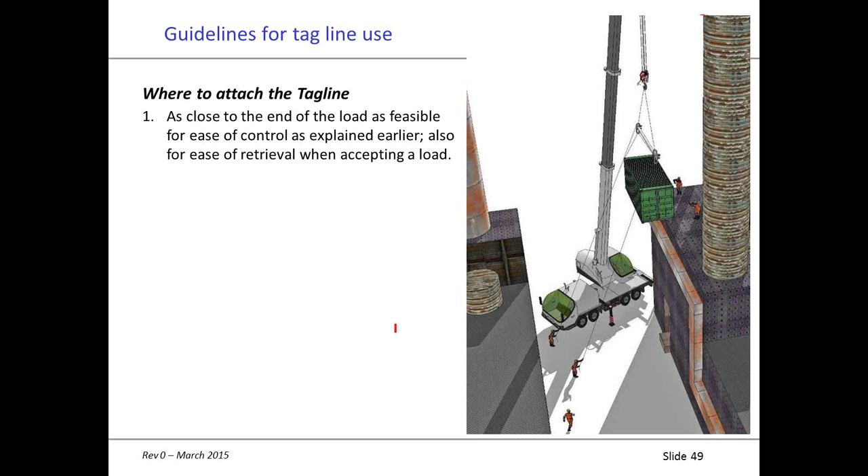We also tie them to the rigging assembly when setting loads with complex rigging arrangements at heights, so we can control the rigging assembly back to the ground. Shorter taglines may be needed for personnel at heights to take over control of the load once it's near the setting point. This would also be advantageous when setting loads over power lines.

Now, you're going to need to plan this carefully. Remember insulating links and the distance away from power lines that you have to stay. At the corners of loads with large sail areas and pieces of equipment, you may require more than 2 taglines.

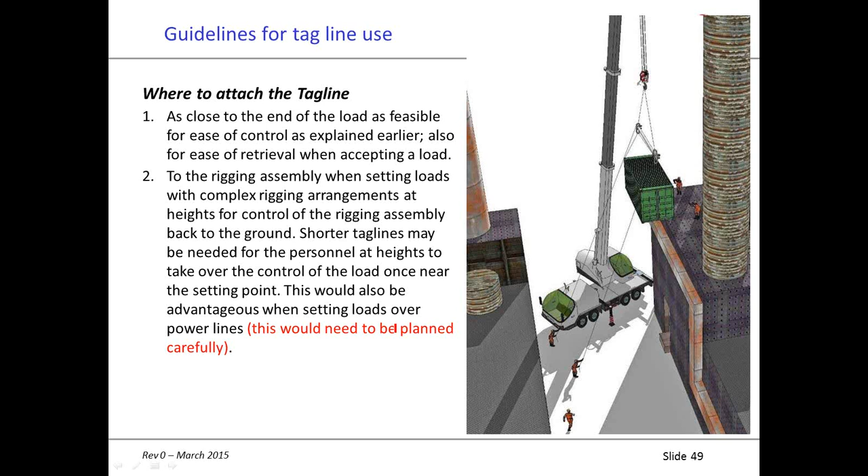How to attach taglines to the load: the use of a bowline or a mechanical hook to a fixed point.

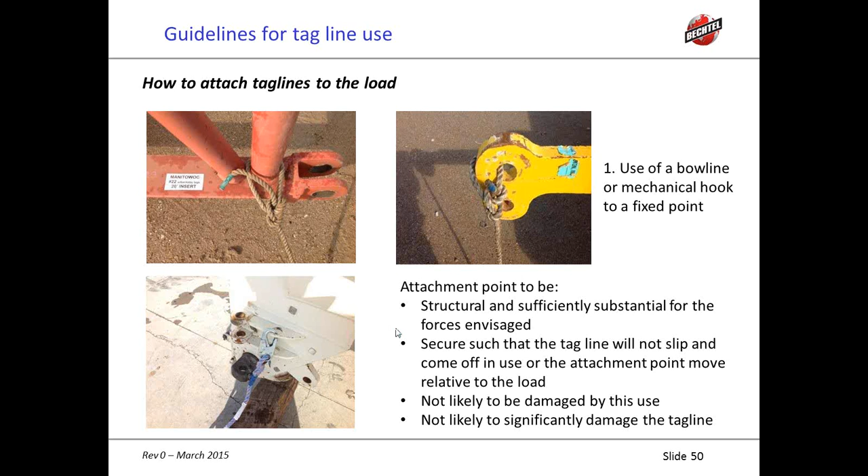Make sure that your attachment points are structural and sufficiently substantial for the forces you're going to put on it. Secure so that the tagline will not slip off or come off in use, or the attachment point move relative to the load. Make sure you're not likely to damage anything - you don't want to be tying to door handles, because if you have to put a considerable load on it, you can damage that, and you don't want to damage your tagline itself. So make sure you stay out of the sharp corners.

Now here I've got a clove hitch used on a small bundle of pieces of pipe, with and without a stopper. The stopper is just a half hitch to keep that knot from coming undone.

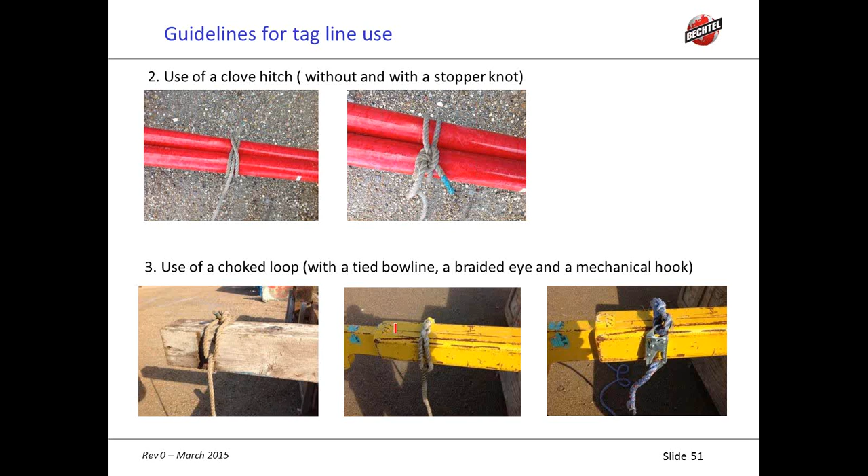In the pictures below, you can see I've used a choked loop, either with a tied bowline, a braided eye, or a mechanical hook, so that when you pull down on that, the more force you put on it, the tighter it just gets.

Number 4, I'm connected to the rigging assembly here, and this is a container lifting frame, so that we can control it to put it over the next load we pick up. But also we've got a tagline tied to the container itself so we can control it when it gets close to the ground.

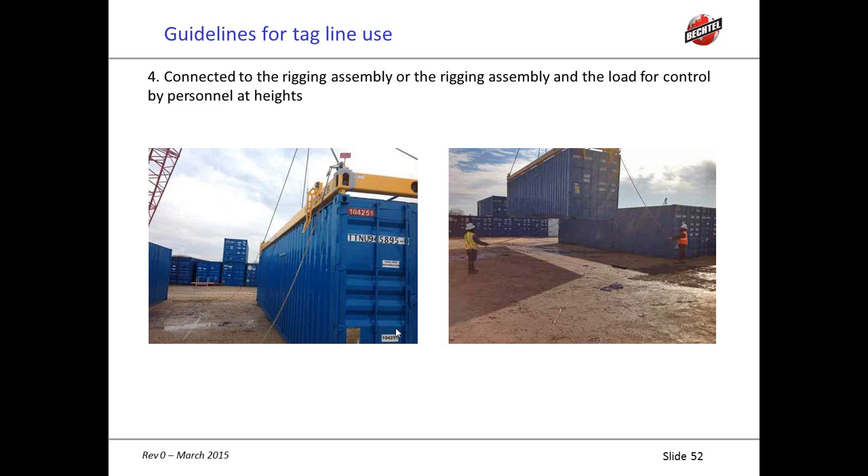Now, the use of the figure 8 knot for heavy loads — you may want to think about using a thimbled eye when putting loads at extreme heights, such as wind turbine generators and propellers. Use it with a dead man or a capstan hoist. The figure 8 knot only reduces the capacity of a rope by about 15%.

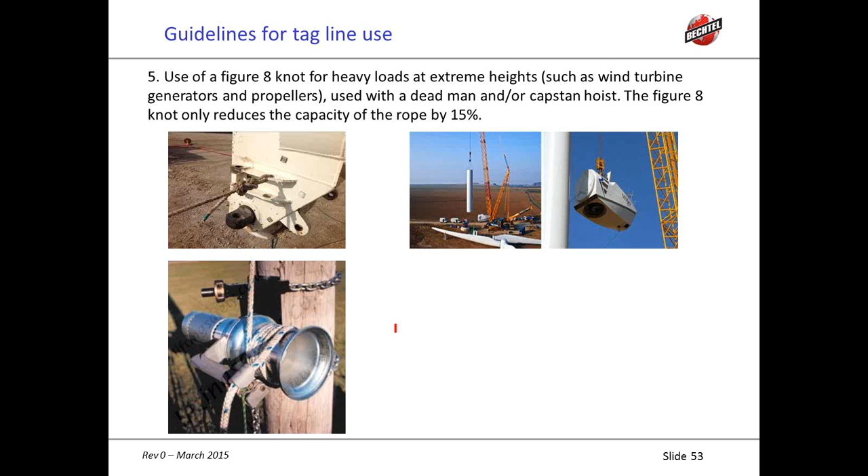The key tagline considerations: number 1 is the type of load — whether it's a small, short load, beam, straight run pipe; a light, long load like bundles of rebar or small bore pipe; large light loads like sheet steel, form panels or wall panels; or large heavy loads such as compressor, lube oil skids or generators; and loads at heights, like steel erection, setting equipment in or on structures, or wind turbine work.

Need to take into consideration the wind conditions, the shape of the load, the travel path — is it clear or congested — the orientation to the boom, whether it needs to be turned during the lift, hand off to other personnel at height or down in an excavation, power lines going over them or working close to them, the number of personnel needed, their taglines, and their lines of sight to the operator and to each other.

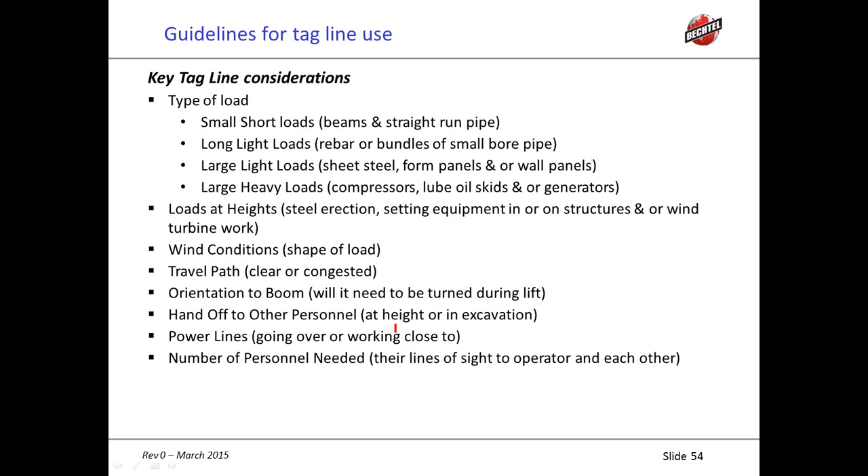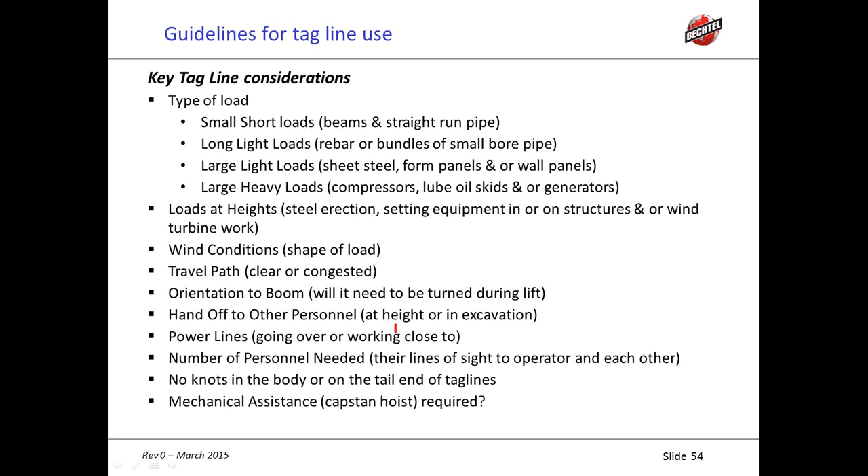Remember, no knots in the body of a tagline or at the tail end of taglines. Mechanical assistance may be needed, like capstan hoists. Always use a rope intended and recommended for tagline use, and wear your gloves when handling taglines.

Never wrap a tagline around an arm or a leg in an attempt to stop a load swing. Keep the spare end of the taglines tidy so as not to be a tripping or snagging hazard, and to allow unimpeded paying out as required. Never step into the loop of a tagline.

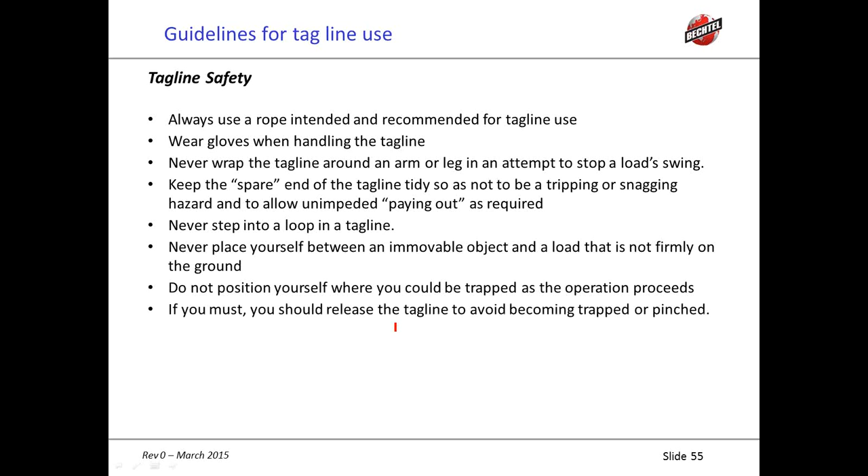Never place yourself between an immovable object and a load that is not firmly on the ground. Do not position yourself where you can be trapped as the operation proceeds, and if you must, release the tagline to avoid becoming trapped or pinched. Be very aware of power lines and the proximity of the lifting operation — even synthetic slings can conduct electrical charge if damp.

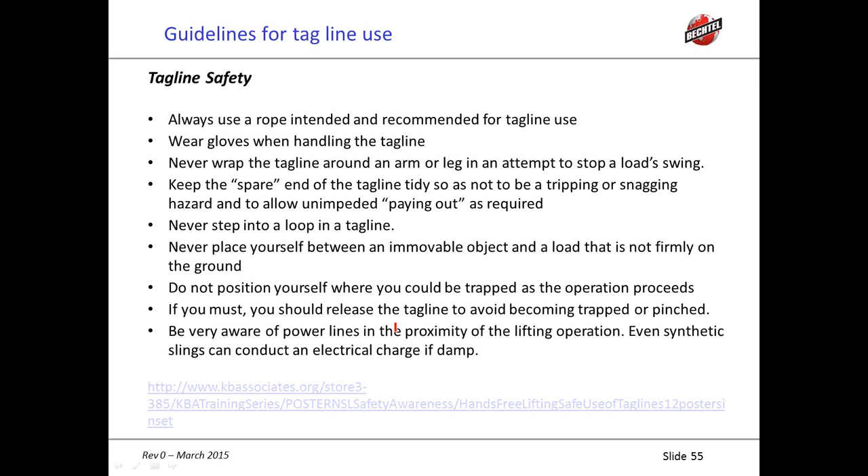Okay, we're back to this again. Let's repeat the poll. I don't know that we're going to get anything a whole lot different than the first time, seeing as nearly all of you decided that we would do it, but let's do it again.

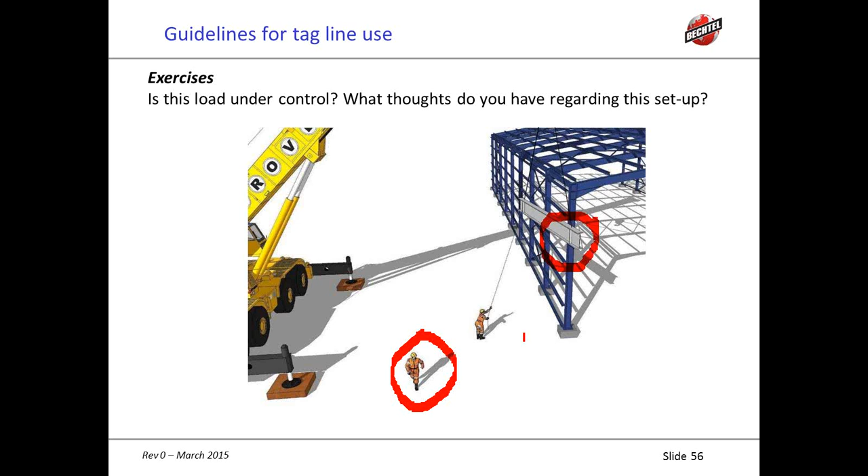Here's one from Deanne. She asks, how do you hold the tagline when the load is moving? What is best recommended? What's the best recommended speed the tagline is going through the glove? I don't know if I read that last part correctly, but let's start with how do you hold the tagline when the load is moving.

Start off with gloves on your hand, and when you're paying this out, you don't want to let it slide through your hands. You want to do this hand over hand. It's kind of the same principle as turning your car - you don't just let the steering wheel spin through your hands. It's hand over hand, slow as possible. Don't get in any rush. This is one of the things I see happening a lot, people get in a hurry when doing lifting operations. Slow and steady wins the race. Nice and easy, don't get in any hurry, don't get in any rush. If things do get that way, just stop and start over.